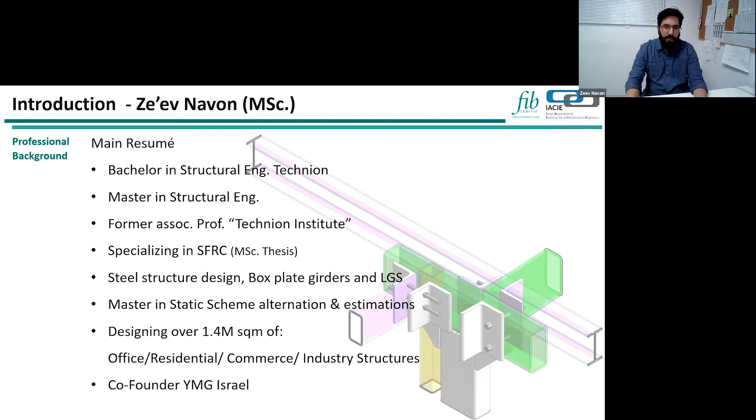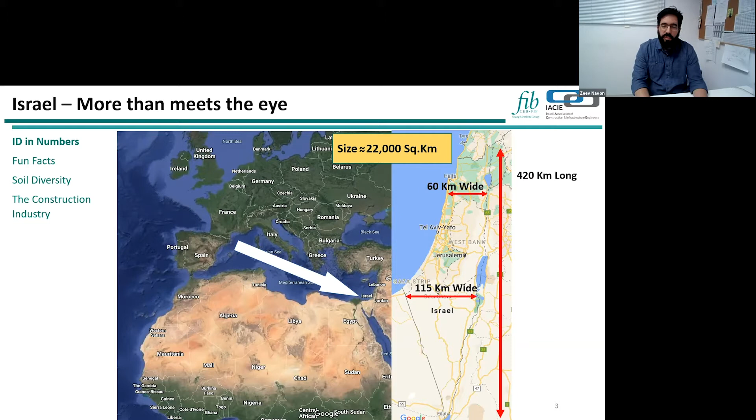Fun facts about Israel: there's only one big mountain, in the north, we call it Mount Hermon, which is snowy mostly in the winter. There's one main river, the Jordan River, which is actually the border between Jordan and Israel. Both Jordan and Israel share the lowest place on earth, where you can just drive by with your car and walk side by side, minus 400 meters below sea level. It's a pretty interesting place, and we'll talk about it. And of course, Jerusalem, the old city, the holy city, which you probably all know.

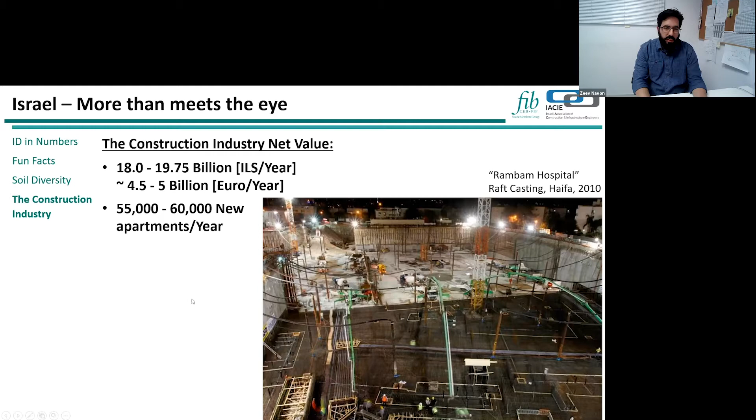I would like to talk about the Shalom Meir Tower, which is the oldest high tower in Israel, 34 floors, 123 meters high. It was under construction from '59 till 1965, almost 6 years to be built. From '65 until the '90s it was the highest building in Israel, and for almost 2 decades, I think, it was the highest building in the entire Middle East.

From '99 it got replaced by one of the 3 towers, the Azrieli round tower. For 34 years it was the highest building in Israel. So you can see there were like 40 or 50 years of, let's say, nap time in the construction industry. From '99, from the year 2000 until now, 2 decades, the skyline has changed a lot.

Fun fact about the Migdal Shalom tower is that there wasn't any earthquake code in Israel at the time, so it got built by the Californian code, which we all know is pretty severe. Through the year 2003 till 2004 it got renovated, and after an earthquake double-check and reverse engineering, they decided to put a pool on the top floor. So this should be enough, I guess.

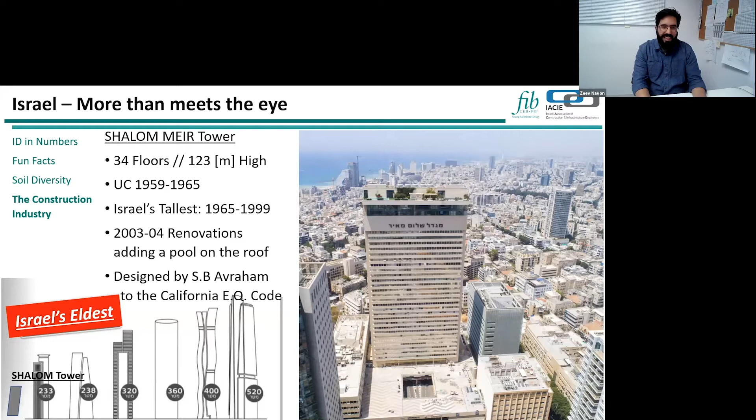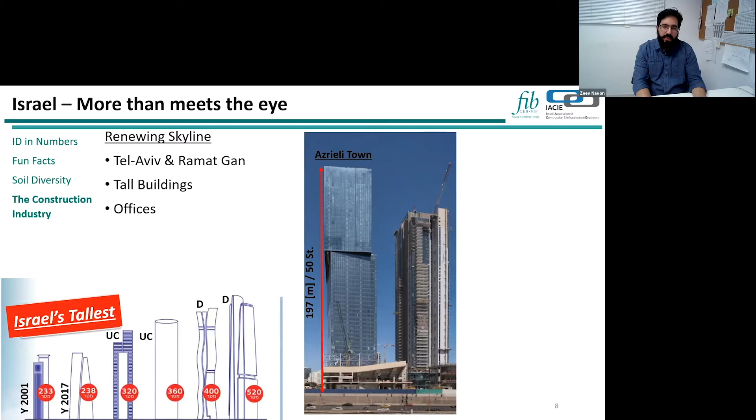We can see the skyline mostly in Tel Aviv and Ramat Gan, which are pretty much the main section of Israel. We have the Azrieli Town, which is 197 meters, 50 stories. We have Moshe Aviv, 70 floors in Ramat Gan, and this circle tower built in 1999, which replaced the tallest building in Israel, the Shalom Meir Tower. All three of these towers on the right side show a triangle, a circle, and a rectangle building shape.

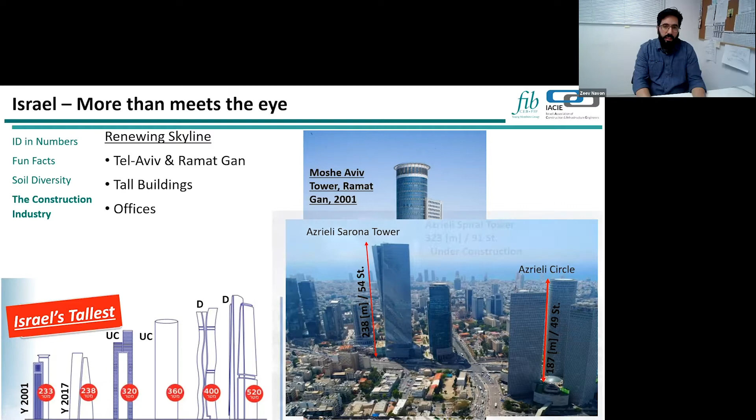And Azrieli is actually going to build a new one. Over here in the middle is the Sarona Tower, also by Azrieli. There's another one under construction, 91 floors, 323 meters high. We call it the Azrieli Spiral Tower, which is under construction right now.

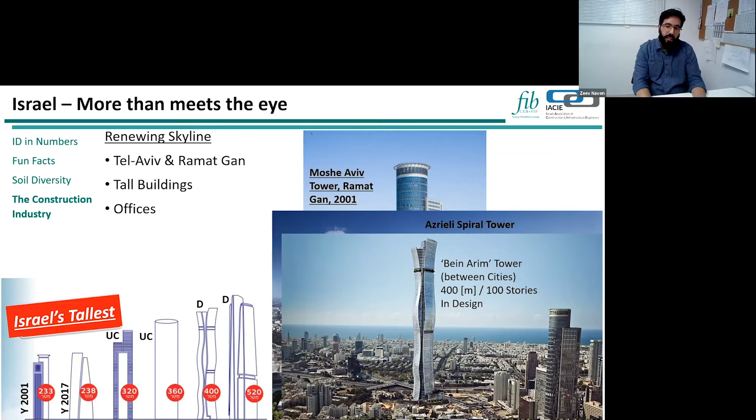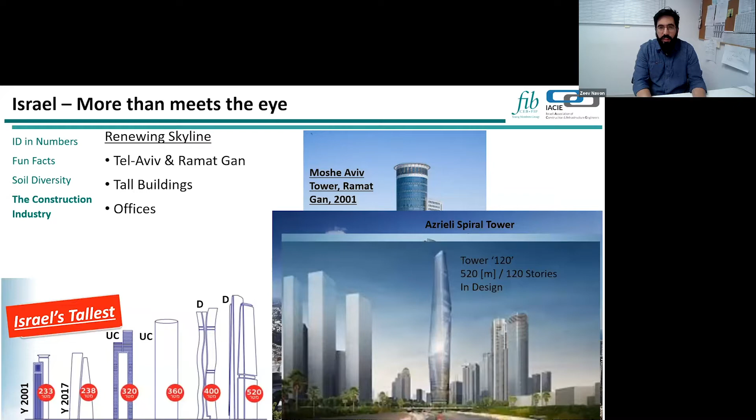Two main mega tower buildings are in the design stages right now as we speak. Bein Arim, which means 'between cities,' around 100 stories, 400 meters high. And the 120 Tower, which is obviously 120 stories high, which apparently is going to be one of the highest accommodated towers on Earth, with apartments or maybe offices around 520 meters high. So it's pretty high without any major antenna or triangle on top.

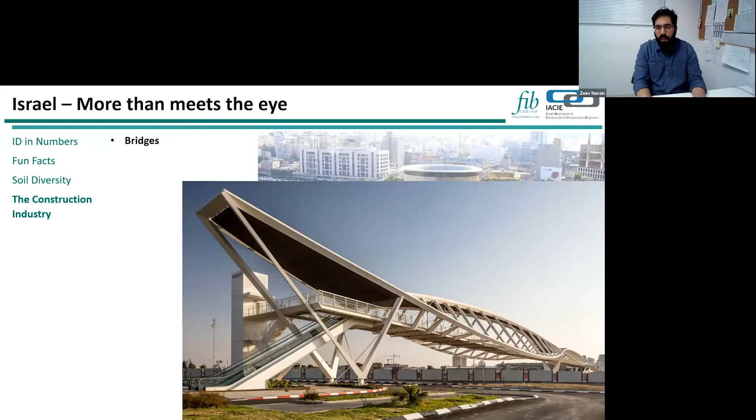Bridges-wise, there have been a lot of new construction, a lot of new bridges in Israel in the last few years. Some of them are steel bridges, as we can see here. The Yehudit Bridge in Tel Aviv was designed by Rokach Ashkenazi. This is the Kiryat Bridge, also a steel bridge, pretty nice one. Bridges in Israel have actually won some contests in Europe and worldwide. This is a steel structure bridge in Be'er Sheva, also designed by the Rokach Ashkenazi office.

You can see there are also many railway bridges and highway bridges, off-road and on-road, concrete bridges with massive pillars. Some of them will rise to 60 meters high, and even 90 meters near Jerusalem.

This is the most famous bridge, I think, in Jerusalem, because it was designed by Calatrava, who we all know, and it's made out of box plate girder from steel, and it's used for Jerusalem's light railway.

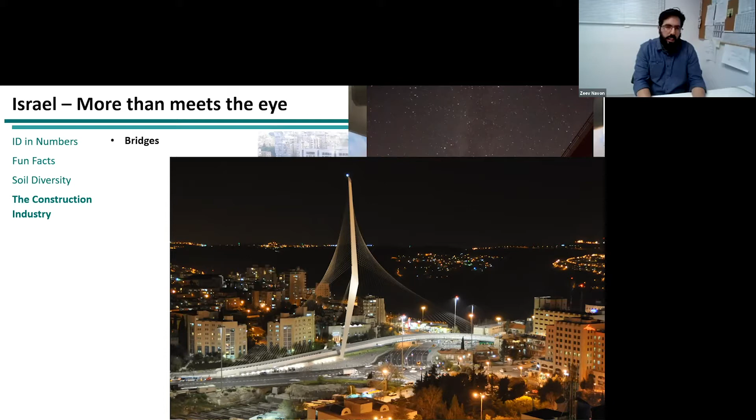Some special projects in Israel in the last years - we call it the Red Line, or Israeli Metro, underneath Tel Aviv, Ramat Gan and Bnei Brak, some main cities. Over here we can see the TBM tunnel, and a massive structure to hold the groundwater behind the walls.

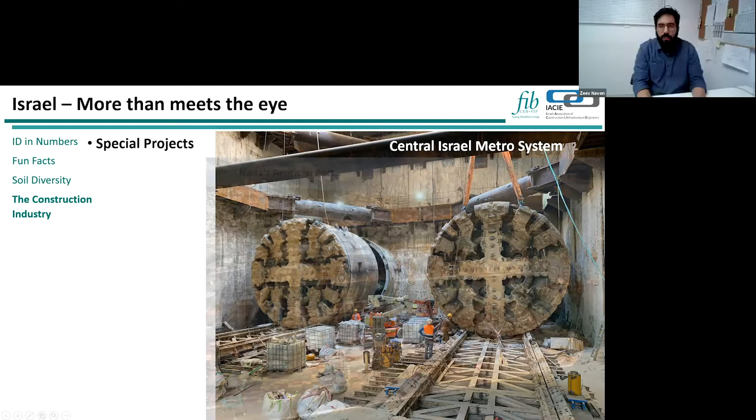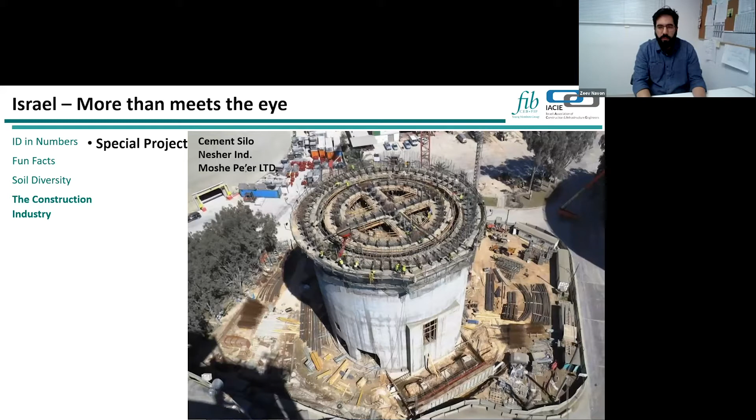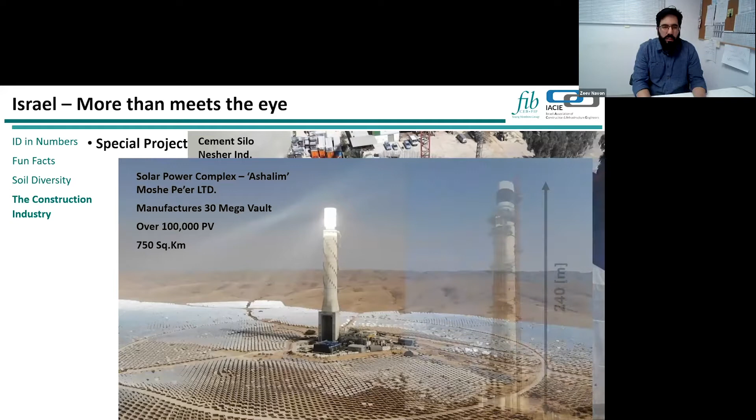As you drive by to the south, it looks like a sun.

So, becoming an engineer in Israel - there are some stages, most of them you probably know, regarding the academic institutes and the academic procedure you need to go through: a bachelor degree. For soil mechanics and soil engineers, there's a master degree that must take place. And through the internship process, which is the main process, I think, for the young engineer in Israel.

It's formulated by 3 years of internship, in which the young engineer will try to get into a firm - a renowned firm who deals with massive projects and massive design, construction, management. And through the years of this process, they need to handle previous reports and try to cover the knowledge they've gained through the internship. In the end, there's an exam, which is a governmental exam with a theoretical section and a practical section that you must pass to become an authorized engineer in Israel.

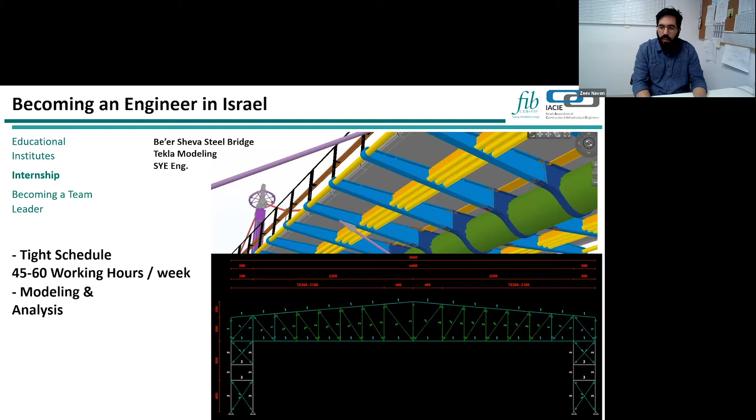So, becoming a team leader - I think one of the most important things as a team leader is to master your expertise. While you work 60 hours a week, that's give or take 230, 240 hours per month, and we all know it takes around 10,000 working hours to master something. So it's pretty common that during the first 3 years of internship, you actually master your expertise.

Every minute you spend working, calculating, doing a static scheme, trying to figure out the base model, how the flow chart and the loads go from the roof through the slabs all the way to the foundation - it's something you must know by heart.

Also through the tasks and schedule and through the teamwork, which I think in Israel is pretty important, because the vibe through a project procedure is that everyone needs to take part, every voice matters, and it doesn't matter if you are a young engineer or a senior engineer, you can still notice something that will do very good to the project, whether it's work-wise, schedule-wise, or budget-wise.

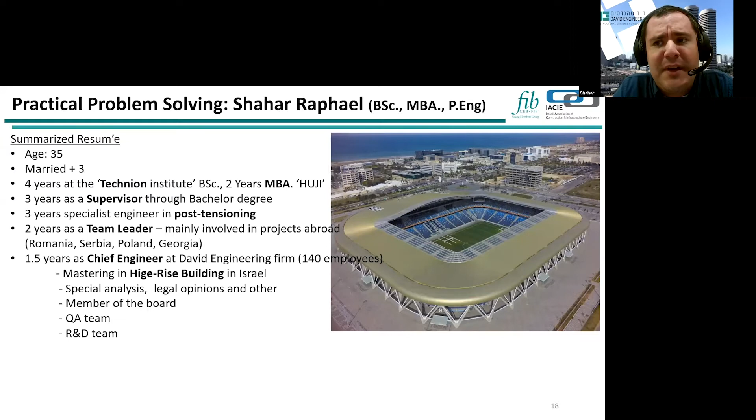After graduating, I focused on post-tension elements. I designed hundreds of thousands of square meters of post-tension slabs and huge transfer beams that I will show you an example of in a few minutes.

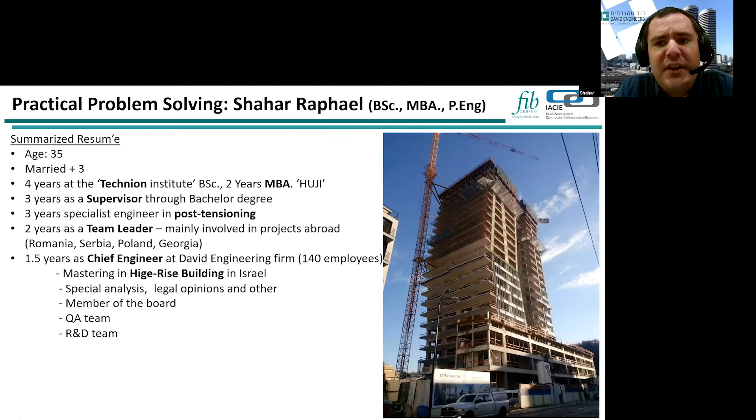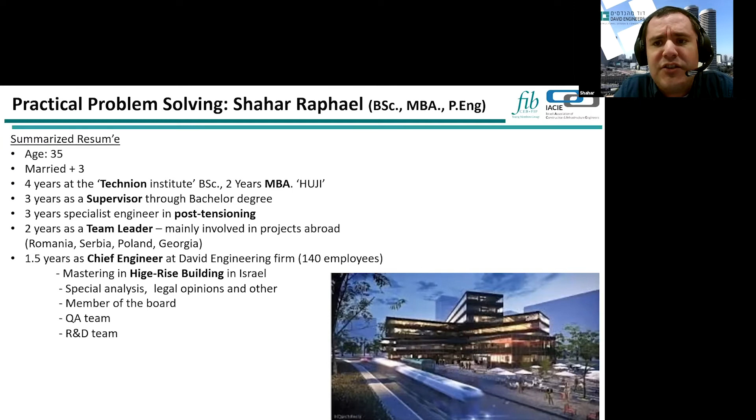After 3 years, I became a team leader, and I had the opportunity to work on mega projects abroad from Israel: a mall in Romania, an office and residential project with a 30-story high building in Serbia, projects in Georgia and Poland, and many more projects in Israel, including super tall buildings like 60 to 90 stories and more.

After that, I was assigned to be chief engineer of the firm. Two words about the firm: David Engineering is the biggest structural design firm in Israel, with approximately 140 employees, 4 partners, 30 years of experience, and more than 3,000 projects. Many of the high-rise buildings in Israel were designed by the firm.

As chief engineer, I am a member of the board of the firm, and I am in charge of the quality assurance team that deals with the quality of our products inside the office and supervision on sites. I am also in charge of the R&D team, research and development, where we develop internal software to increase our productivity and implement new technologies and products. In this role, we are also involved with the Israeli Standards Institute. I also have a legal department and special analysis under my hands.

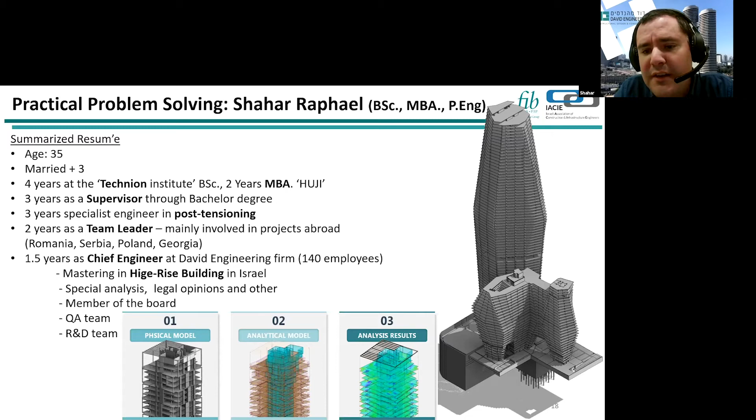As you can see, in only a few years, I worked hard, but got plenty of experience that I am not sure is familiar in other places around the world.

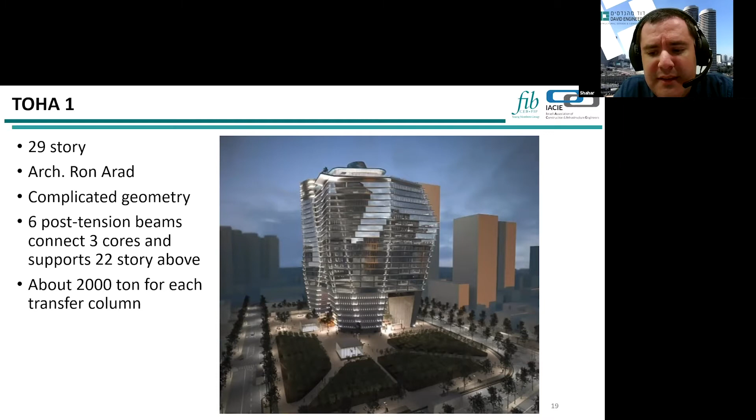Now I would like to show you an example of a unique project I was in charge of only 1 year after graduating. The name of the project is Toha 1, a 29-story building with a very unique shape. The architect is Ron Arad from London. As you can see, the special geometry of the building hides many structural challenges, starting with 3 cores, including inclined columns that break at different angles on different floors, flat slabs, and 6 transfer beams that carry the 22 stories above, with columns that transfer loads of up to 2,000 tons.

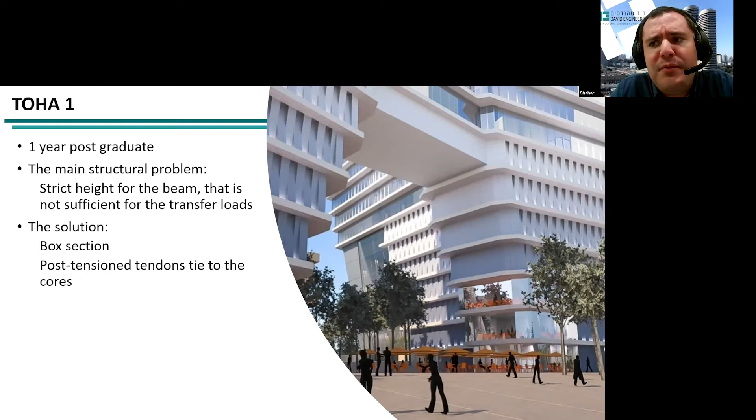The solution I came with was to use the slab between those beams as a box section. I thickened the bottom slab between the two beams. The thickening was upwards, and the architect didn't care.

Tensioning the bottom slab, and the most effective thing was tying the upper part of the beams to the cores at the sides, which gave some continuity and solved the problem.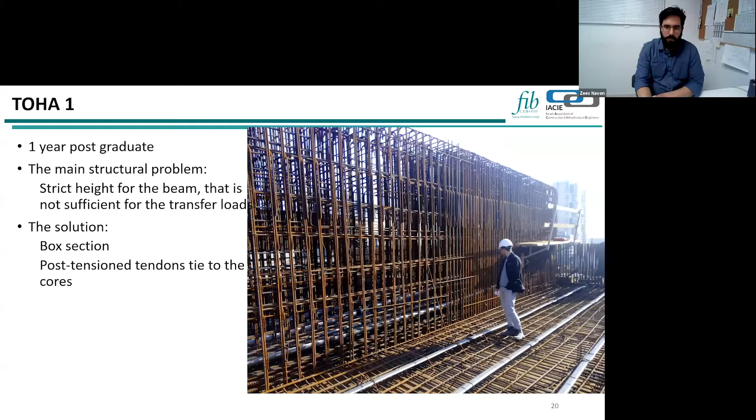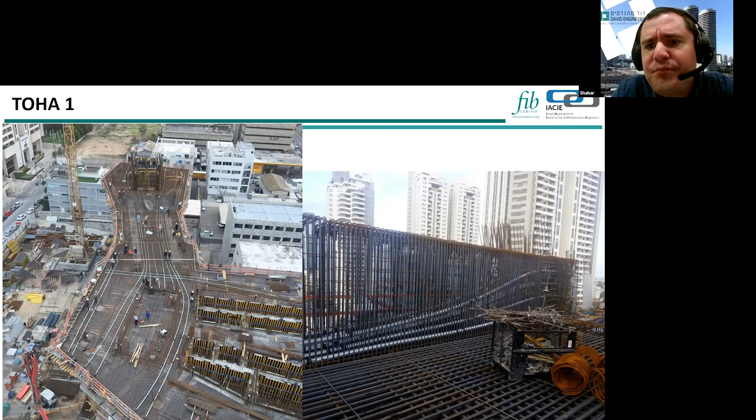Here you can see the height of the beam with some tendons at the bottom slab. This is also the tensioning of the beam and the bottom slab. And here you can see from above the upper tensioning tie to the core on both sides.

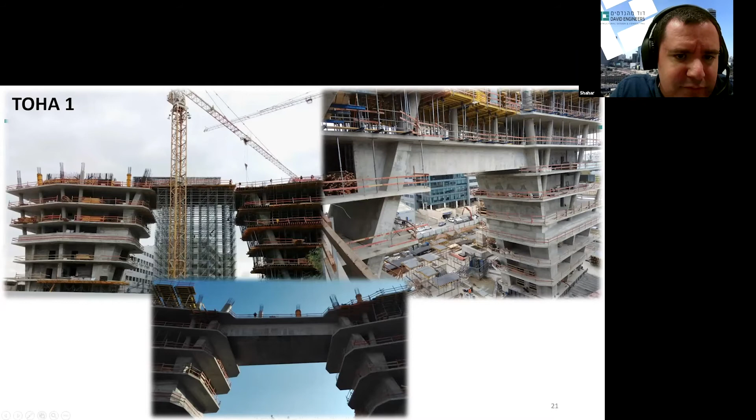Here is the final product, and on the left you can see it while in production. This is the finished product, quite the same as the initial vision.

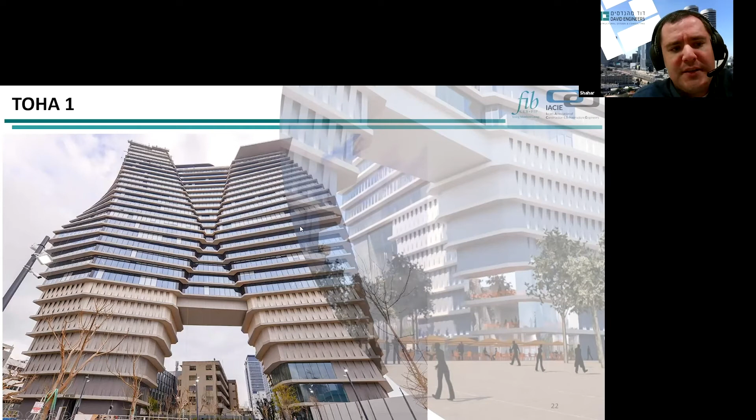This is an example of how to let a young engineer grow, to think, and to find a solution out of the box, to take responsibility and to execute the solution. Thanks, Shahar, thank you very much.

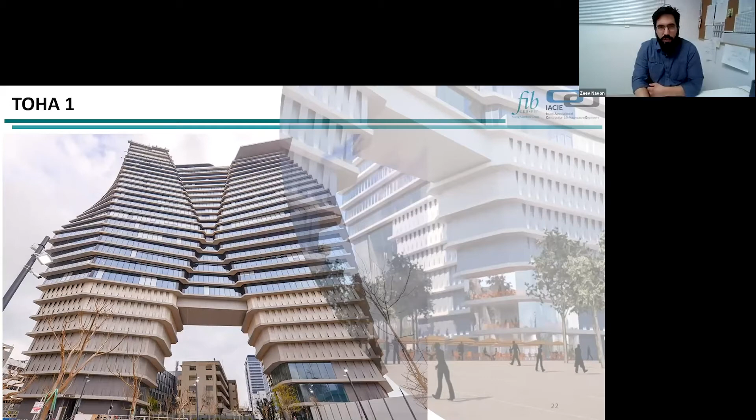It's actually a pretty massive structure and an interesting building. And correct me if I'm wrong, I think there's another sibling of this structure that was 80 stories high, right? Yeah, 80 stories high.

I would like to share with you an interesting project held by the Israel Nature and Parks Authority. This is the owner. The site management and contractor is the City of David, and the archaeological supervision is by the Israel Antiquities Authority, designed and managed by Grushko Engineers, the firm that Gilad Fraiman, also another YMG board member, works in.

This project, and Gilad himself, won the ITA Tunneling Award, held almost 2 months ago. ITA, as you know, is the International Tunneling Association, and it got first place in the category of oddities of the underground. I would like to show you a short video, 6 minutes long, of this incredible project, which showcases the depth and history of Israel through engineering and an archaeological point of view. I would let the video do all the talking. Thank you very much.

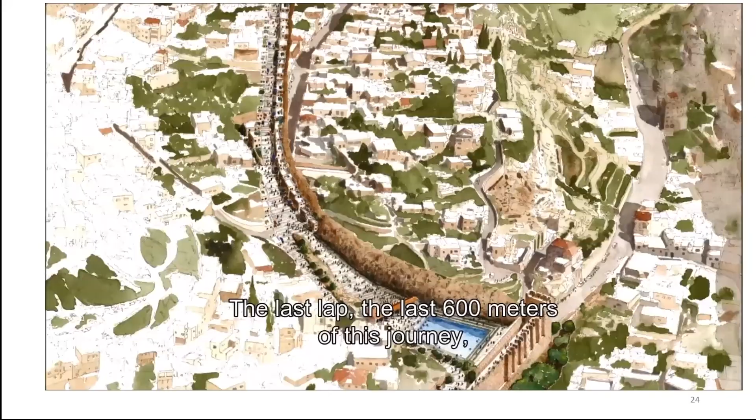This is the last part of a fantastic journey, a memorable journey, in fact, a journey that would never be forgotten, of families, people, children, elder people. They gathered in small towns and villages. They came together, and then they began their long trek in convoys up the main roads to Jerusalem. The last lap, the last 600 meters of this journey, took place on the pilgrimage roads that we are excavating now.

Let's take a minute to get oriented. In Israel, in the most sacred part of the holy city of Jerusalem, just below the old city, the Western Wall and the Temple Mount, lies the City of David.

At the southernmost tip is the Shiloach pool, and from there, beneath the modern-day road, lies the original thoroughfare upon which pilgrims walked in the Second Temple period. It has been hidden deep underground for over 2,000 years. A project has been revealing the original flagstones of that ancient thoroughfare.

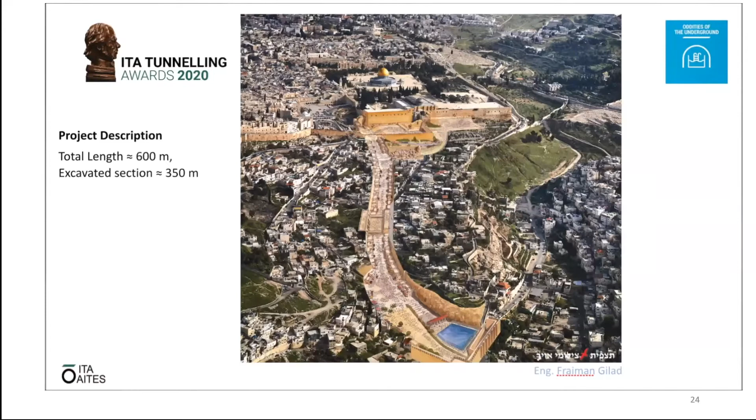The length of the tunnel is about 600 meters, beginning at the Shiloach pool and stretching to the Temple Mount. The illustration gives an image of the ancient Pilgrims Road with the Shiloach pool on an up-to-date aerial photography. The depth of the tunnel varies from tens of centimeters to about 6 meters.

We can describe the layers from bottom to top. The upper rock layer is limestone from the Binah Formation. Above it, the drainage canal in compacted fill that was placed with some stone paving of the road. Above it, archaeological fill, and at the top, modern fill. The archaeological fill is very heterogeneous due to the mixture of stones, soils, and voids. Thus, the soil parameters have a very large variation.

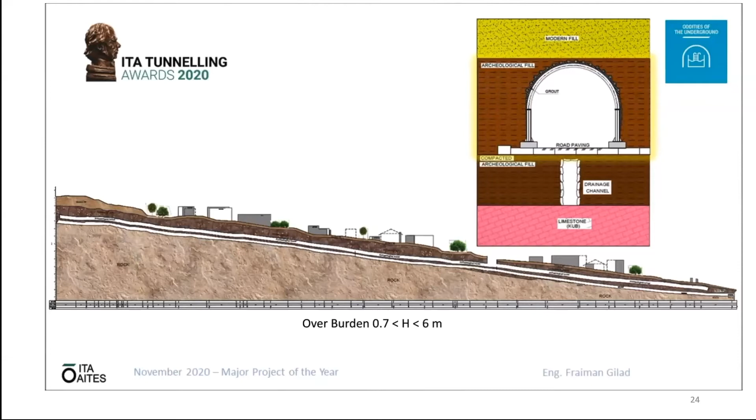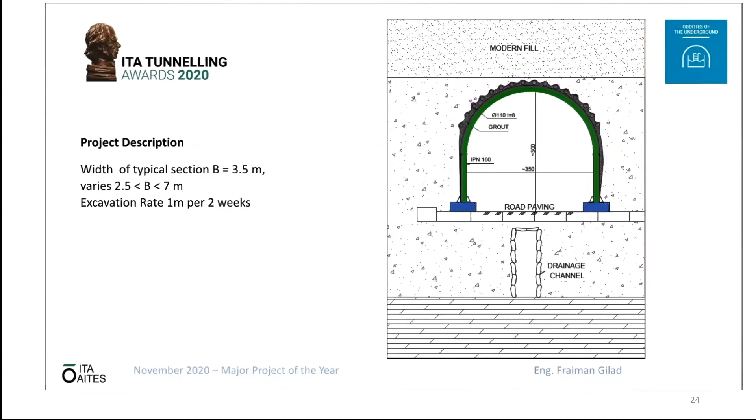The typical section of the tunnel is about 3.5 meters wide, but along the tunnel there are sections with a width of 2.5 to 7 meters. The typical support system is made of steel arcs, IPN 160, every 120 centimeters. At some sections, the support system was changed to steel frames due to height limits. A pre-support system of pipe umbrella is installed above the arcs and frames. The arcs and frames are based on concrete cast-in-place shallow foundations. At some points, with high loads, mini-pile foundations were installed.

The following animation describes the phases of excavation and support.

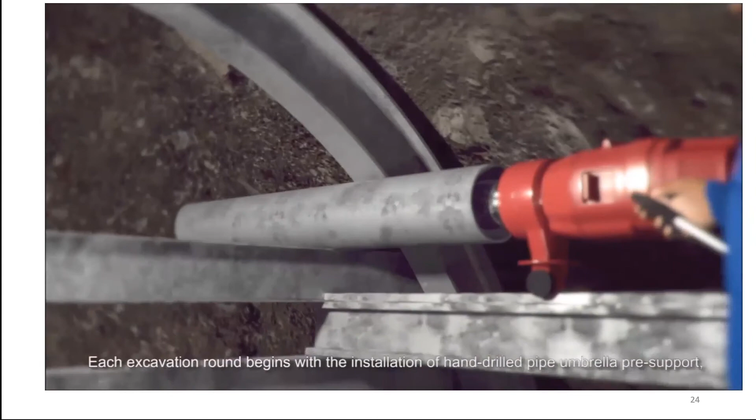Each excavation round begins with the installation of hand-drilled pipe umbrella pre-support, which ensures the safety of the excavation and limits the settlements at the surface.

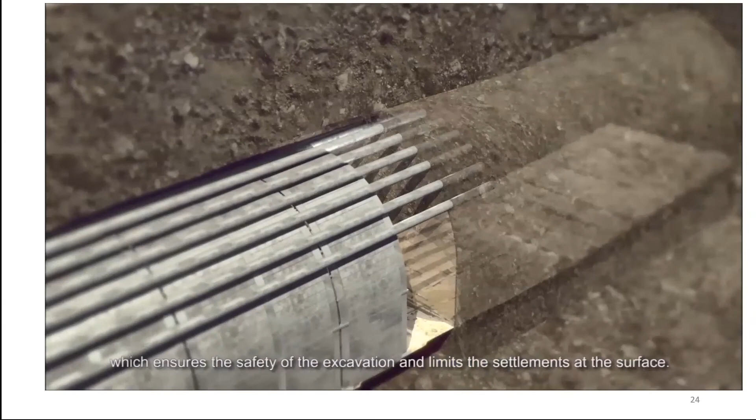Following the completion of the pre-support, steel arc is placed right under the pipes and the concrete foundations are cast in place. Each excavation step, which is 1.2 meters, an additional steel arc is installed.

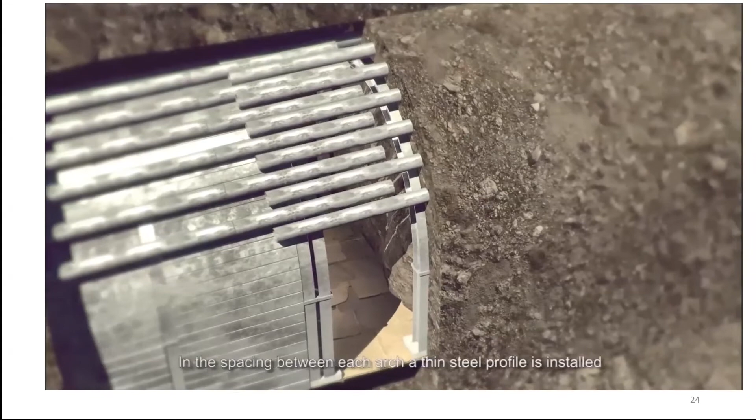In the spacing between each arc, a thin steel profile is installed, and the gap between the arcs and the surrounding soil is then grouted.

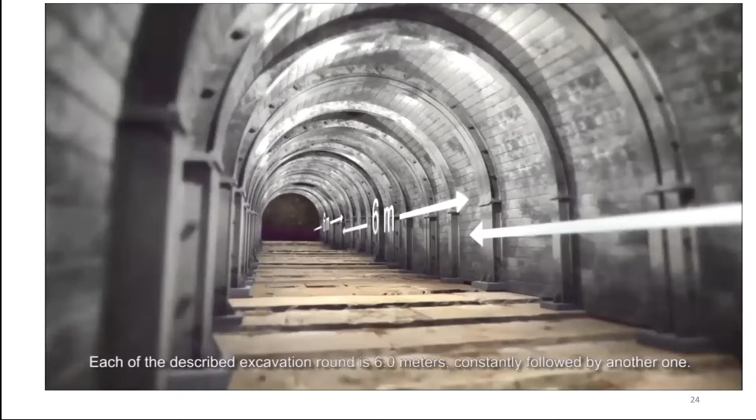The manually excavated soil is finally sent to archaeological classification. Each described excavation round is 6 meters, constantly followed by another one.

Towards the end of the Second Temple period, Jerusalem went to war against the great empire of Rome. Thousands of people, fighters and also civilians who survived escaped under the ground into the drainage canal.

We found, under the pilgrimage road, the exact points, 5 points, where the Romans took sledgehammers and broke through the road and entered underneath the ground into the tunnel.

The wall of the drainage channel was missing, and that was an opening which allowed us to come from beneath and go above the drainage channel in order to begin the exposure of the street.

I remember the first day when we crawled into that little opening in the drainage channel and we began to discover the edge of the street, and we realized what an important moment that was, because it was the moment where we could recreate what happened here 2,000 years ago.

There is no other excavation in the world which puts in such an infrastructure. Nothing of this kind can be seen anywhere else.

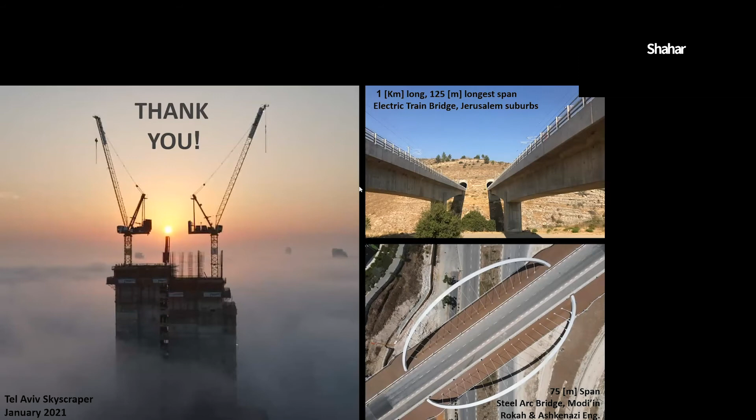For those of you not that familiar with the Young Members Group internationally, you can go to FIB International on the website, and you can find the Young Members Group there and read more about what we do internationally. We try to be a sort of network of young members groups from different countries and try to coordinate some of the work that we can collaborate on and share. Hopefully in the future we can meet, because we try to engage people all around the world and get people to be a part of something bigger in the international arena.

We have a question from Arle Louis Libed, a student from the Philippines. I took this webinar as part of our OJT course. I just want to ask if we will get a copy of this recording and a certificate.

Yes, I think we will be posting this session on YouTube, and you can find information on that on social media, or just go to YouTube and type in FIB International, and you will find all the previous recordings we've had. When you signed up for this course, there was also information about getting a certificate, which requires the Secretariat to put in some work writing those, so I think it's 10 euros to get the actual certificate. But you can check it out on the FIB International website on the link for today's event.

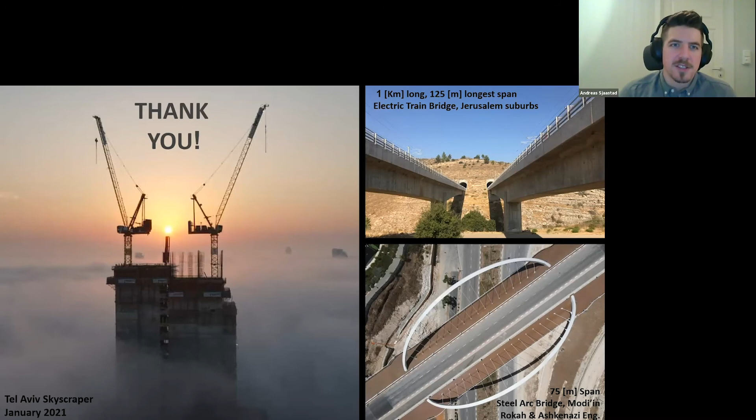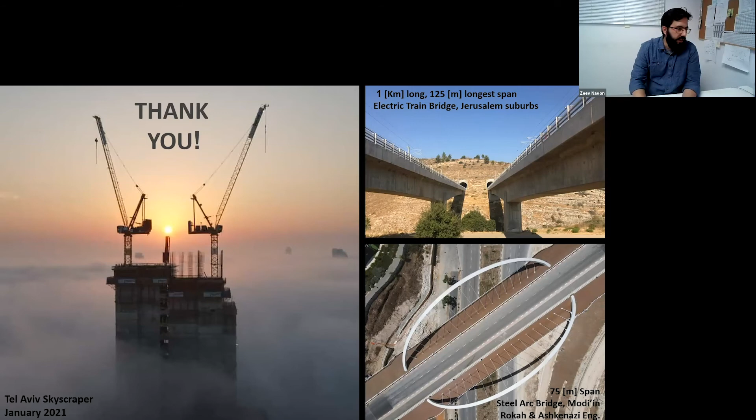Abdullah says he's interested in structural design and construction management as well - can he work in each from time to time? Yeah, sure, you can.

I think the best way, and the most common way at least here in Israel with my colleagues, is to start with structural design. It doesn't matter if you don't complete your 3 years of internship and pass the exam, but you can at least experience the structural design procedure and understand the key factors through the design - what's more important and what's not. So you can make better decisions while working as a construction manager or engineer. The design procedure through design management is very important too, because you walk through the process from the first architectural scheme through the basic structural concept, all the way through mechanicals, MEPs, and interior design, which are the last steps. So I think it's better to start as a structural engineer, and along the road move into execution and management. This is the right way, I think.